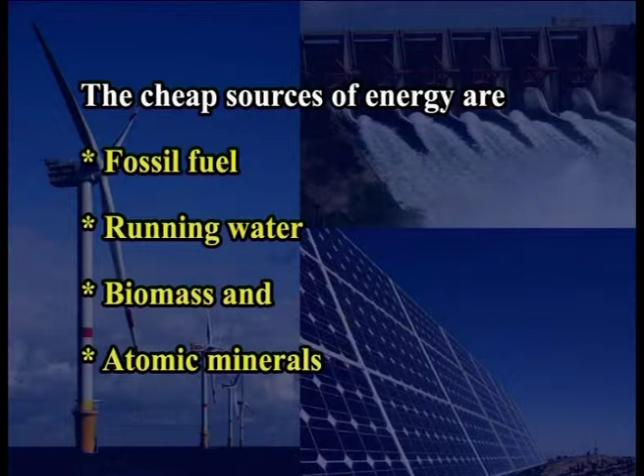Energy may be obtained directly from an energy source or it may be obtained indirectly. Energy is derived from one or more than one sources. The chief sources of energy are fossil fuels, running water, biomass and atomic minerals. In addition to these, solar radiation, wind movement, tidal oscillations, biochemical and geothermal sources also provide a good amount of energy.

The sources and use of energy by the population differ from a developed country to a developing country. It depends on the energy resources available with them. Not all continents have all the needed energy resources.

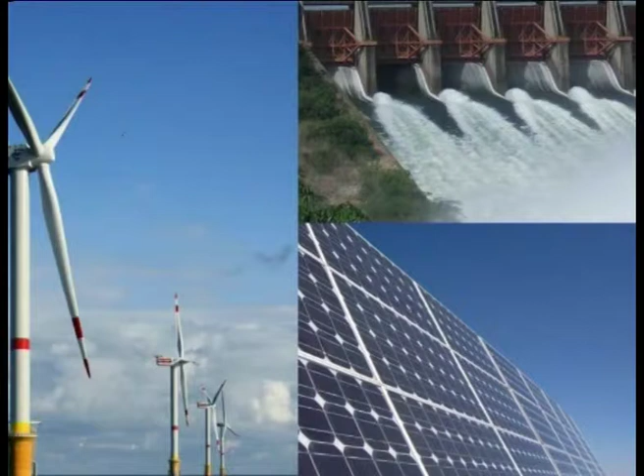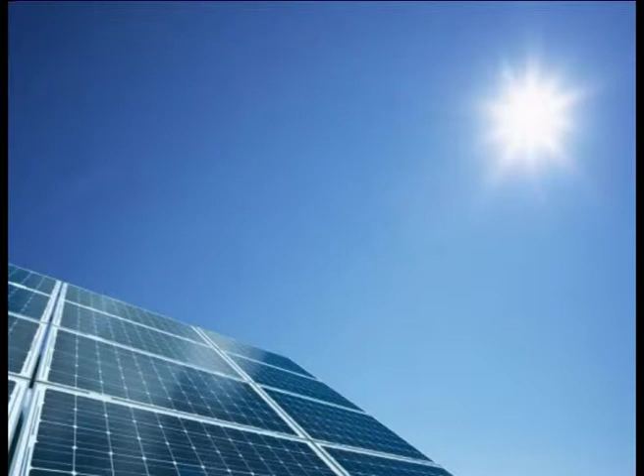Energy can be classified into several types based on the following criteria: primary and secondary energy, commercial and non-commercial energy, renewable and non-renewable energy. Renewable sources are those which will be available for our human consumption again and again. The energy derived from water as hydroelectric power, the energy derived from sun as solar energy, the energy derived from wind as wind energy and bioenergy are the renewable energy resources.

Non-renewable energy sources are those which are permanently consumed for generating the energy and need further supply. Fossil fuels like coal, oil and gas, fissionable materials for nuclear power generation and geothermal sources all come under this category. In this episode, the energy resources are discussed under the following modules: energy from fossil fuels, energy from sun and wind, energy from water, energy from biomass, energy from nuclear and other sources.

Coal is the mainstay of India's energy sector and accounts for over 50% of the primary commercial energy supply in India. Around 74% of the coal produced in India is consumed in power generation. Compared to the other sources of energy available in the country, the known coal resources are expected to last for over 70 years at the present levels of production.

About 85% of the world's commercial energy sources come from coal, oil and natural gas. These are called fossil fuels since they have been developed from the fossilized remains of prehistoric plants and animals. The use of these sources depends on their availability in a country.

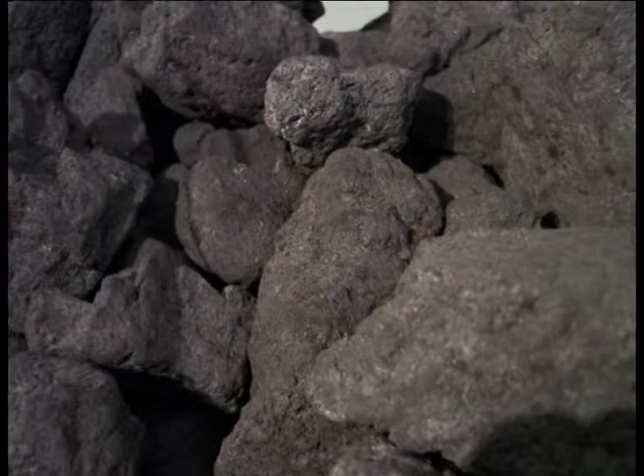While using coal, the one having low sulfur will cause less air pollution. The production of thermal power depends on the ash content of the coal used. The higher the ash content, the lower the efficiency of the boiler and furnaces in the thermal power plants.

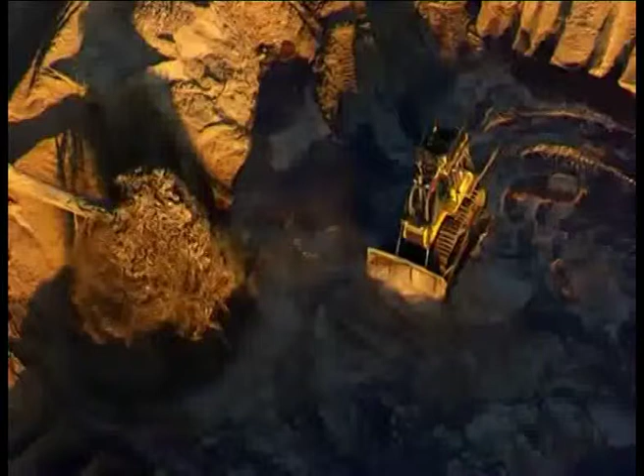The use of coal also generates much solid waste and ashes. For every megawatt of energy produced by a thermal power plant, about 1 acre of land is needed to dump the waste materials including the ash.

Coal-based thermal plants pollute the atmosphere by gaseous emissions of sulfur dioxide and nitrogen oxide, and also produce tremendous amounts of solid waste, fly ash and bottom ash. Coal mining, transport, washing, processing, shipping, combustion and final disposal of ash may lead to potentially adverse environmental effects like aesthetic degradation, noise pollution, dust pollution and the release of trace elements into water bodies, soil and air masses.

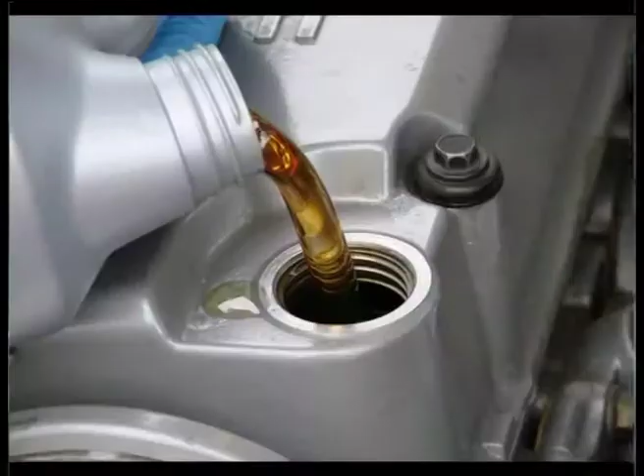Coal is a non-renewable form of energy, the use of which is to be done very economically. The next major source of energy comes from oil.

The oil that is derived from rocks is called petroleum. Petro means rock, oleum means oil. Petroleum furnishes about 40% of the commercial energy used in the world. It provides most of the energy used for transportation and other activities of the population.

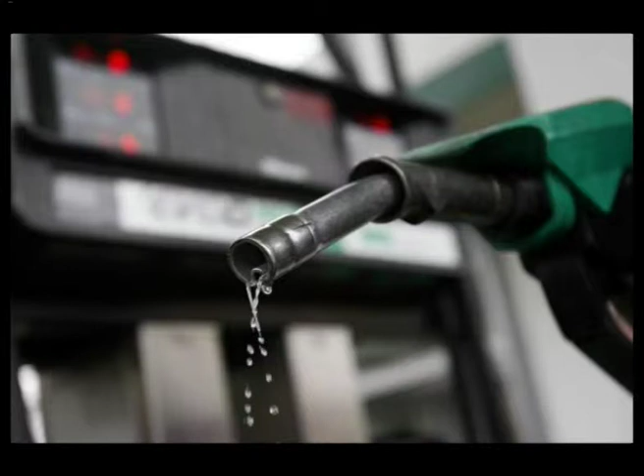In general, petroleum and natural gas are hydrocarbons. They are fossil fuels formed from organic material which escaped complete decomposition after burial in sedimentary beds. Petroleum is a complex mixture of hydrocarbons containing nitrogen, sulfur and oxygen also.

The major source for oil and gas is the fine grained organic rich sediments that are buried to a depth of 500 or more meters below the stagnant oceanic waters. These might have experienced a thrust due to an increase in pressure and heat. The water is deficient in oxygen. Various geological and biological processes have promoted the chemical transformation of these organic materials into hydrocarbons.

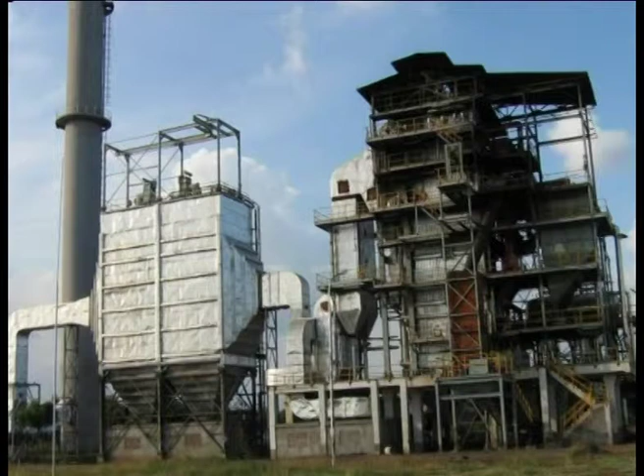They tend to migrate through the porous sediments called reservoir rocks. Like coal, oil also contains some impurities that can cause air pollution, but refineries can remove many of these pollutants when they process the petroleum.

Natural gas comprises several gases but mainly consists of methane. Natural gas which is produced in association with oil is called associated gas, whereas production from a gas reservoir not associated with oil is called non-associated gas.

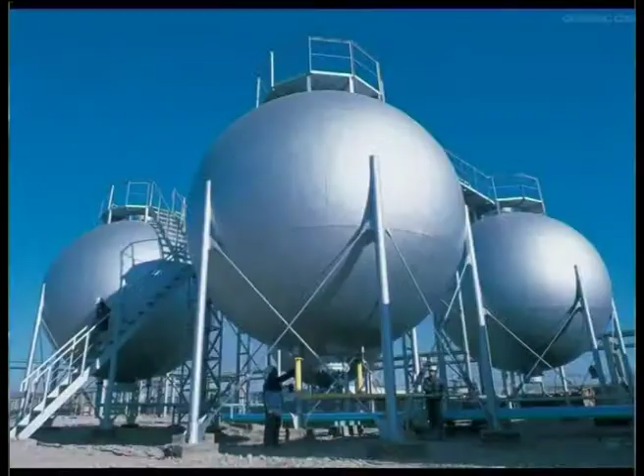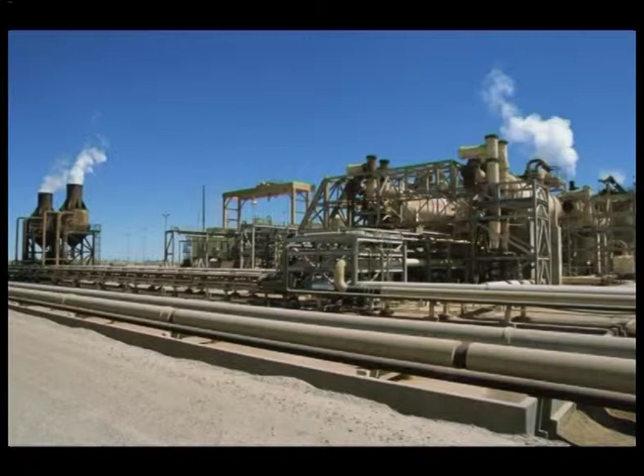Natural gas is the most conventional and convenient fossil fuel. It causes little or no air pollution. Natural gas is a clean source of energy because it is refined naturally during its formation within the earth and does not require further refining. In addition, it can be compressed into a liquid and transported long distances through pipelines.

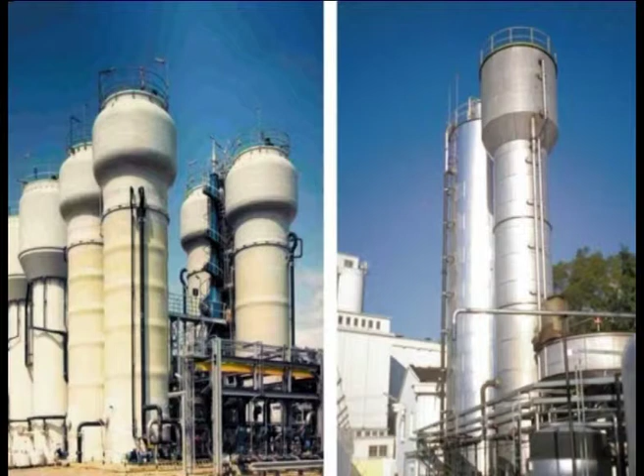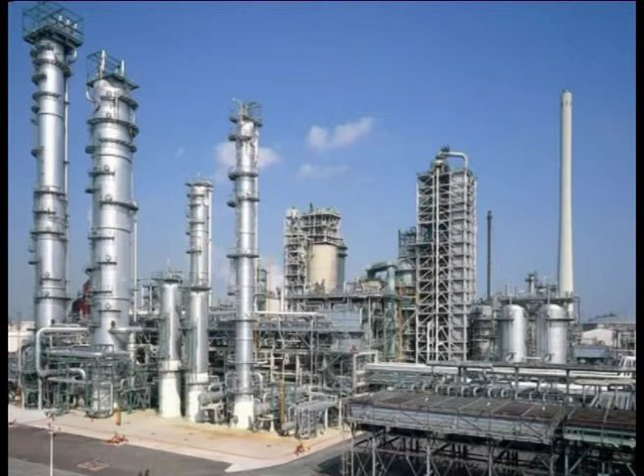Natural gas provides around 20% of the world's consumption of energy and as well as being burnt in power stations, it is used by many people to heat their homes. It is easy to transport natural gas through pipes, and gas power stations produce comparatively little pollution. Millions of people use natural gas to heat their homes, cook their meals and dry their laundries.

Typical gas consists of hydrocarbons having a very low boiling point. Methane, the first member of the paraffin series, makes up 85% of the typical natural gas composition. The following types of gas have been recognized based on their composition: dry or lean gas comprising mostly methane.

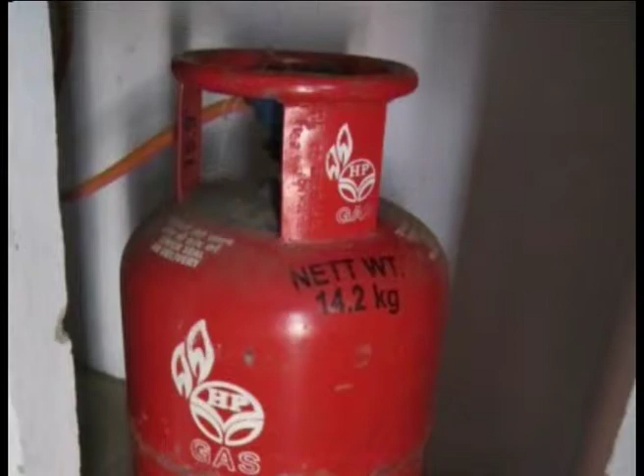Natural gas is used for domestic and industrial applications. The consumption rating for different sectors are as follows: for manufacturing fertilizers, we use about 36% of natural gas. For power generation, we use about 27%. For industrial sectors, we use about 8%, and for the extraction of liquefied petroleum gas or cooking gas, the rest is used.

The energy received from the sun's electromagnetic radiation is called solar energy. It is also used to produce electric power. It is a non-conventional and continuously renewable energy resource and source. There are two methods through which sunlight can be converted into electrical power: using the photovoltaic conversion procedures, or using the solar thermal conversion procedures.

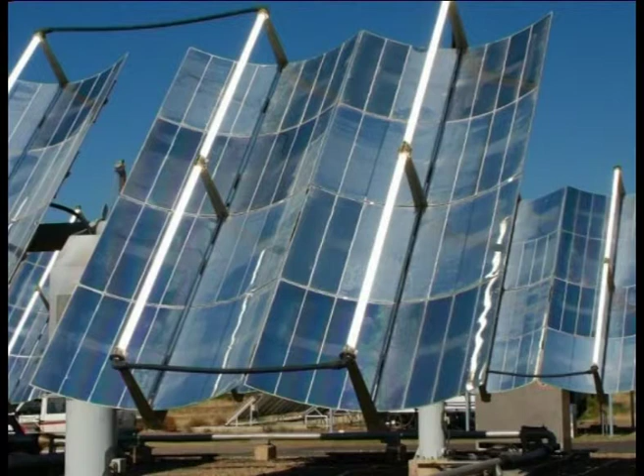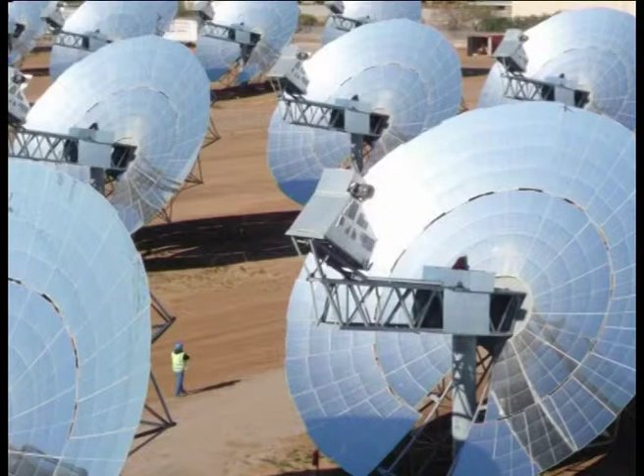It is reported that the solar energy falling on the earth every 29 seconds is equivalent to the human energy requirement for the entire day. It comes from the sun and it is plentiful, but the distribution is very sparse. It must be collected and concentrated to produce usable power, which requires some special devices. Hence, harnessing solar energy is an expensive affair.

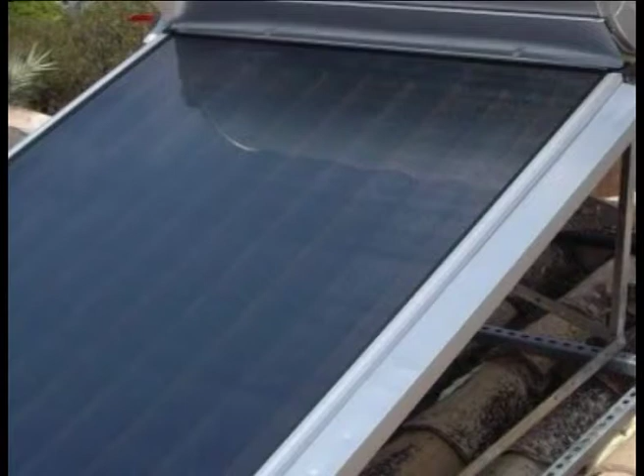A typical solar water heater consists of a coil of copper pipe brazed to a blackened metal base. This assembly is covered by a transparent glass plate or a plastic sheet. The water which is passed through the coil gets heated up by the solar radiation. A very high amount of heat is trapped in this process during summer months.

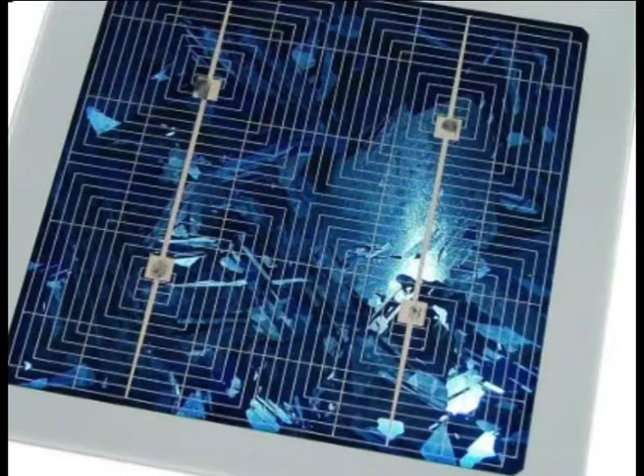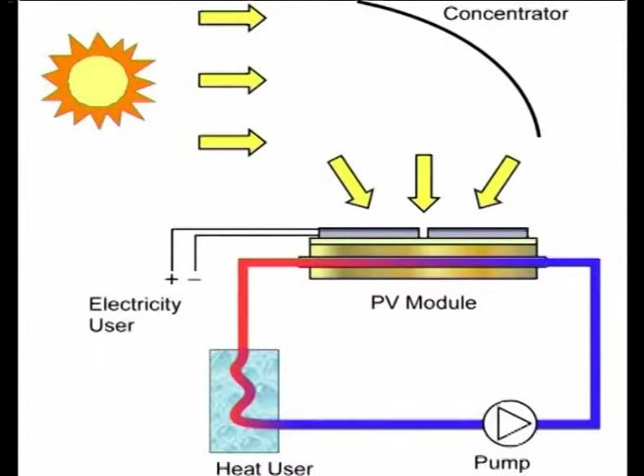Solar energy is also caught to provide power using solar cells. Solar cells are devices made from crystals of silicon to produce electricity from sunlight. They are the photovoltaic cells. Research continues on the application of solar energy for pumping up water, refrigeration, solar ponds and temperature control in buildings.

Consumption by solar energy has more advantages. Some of the advantages are: they provide unlimited power supply. There is no way of producing air pollution, water pollution, thermal pollution and noise pollution due to solar energy. There is no possibility of large scale disasters coming out of using solar energy. It conserves Earth's natural resources, and the technology is available for immediate usage.

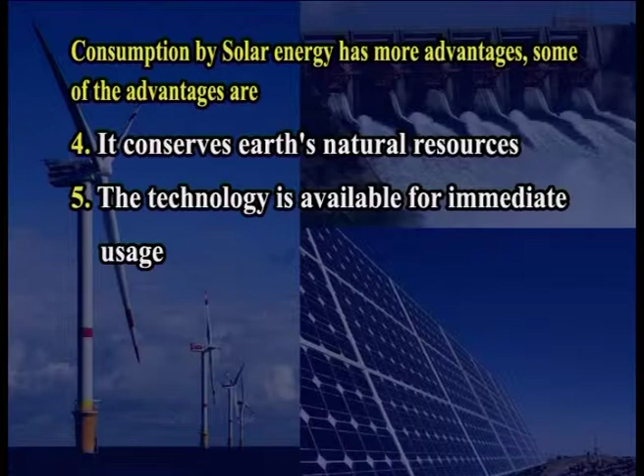The major disadvantage is the expenditure involved in establishing the solar plants. Solar cells are more expensive also. They cannot completely be able to replace the conventional fuel usage, because the society has to bear the cost of establishing the solar panels.

The next one is the wind energy. Wind is a dynamic natural force for providing power. It is the best renewable energy source available on earth. Wind energy can be harnessed very effectively. The blow of wind is allowed to rotate the blades of a windmill that is coupled to a turbine. This drives a power generator and we get electricity.

There are some merits and demerits while using wind energy. The generation period is very low, that is, on an average we may get wind energy for 5 months in a year. This is because of the seasonal availability of a reasonably useful wind.

Power generation starts immediately after commissioning the plant. Power is cost free, generation is cheaper, and the recurring cost is also very less. The installation cost of a windmill is slightly heavy, and the maintenance of machinery is also expensive. But this is a pollution free and environment friendly generation of power.

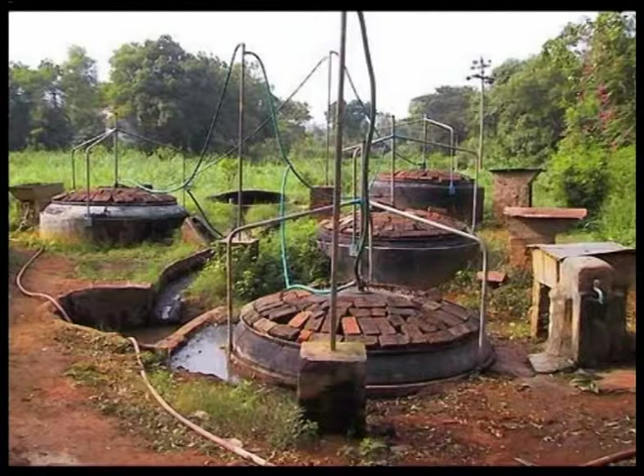Biogas is the methane gas produced or released from organic waste like sewage, garbage, manure or crop residues. These are decomposed substances in the absence of oxygen. This is similar to the natural gas in origin.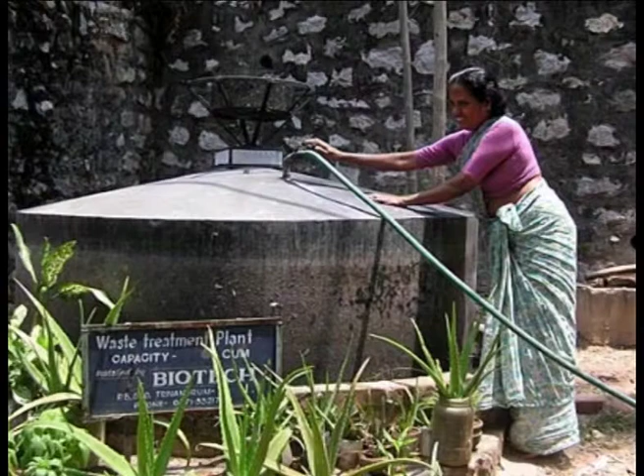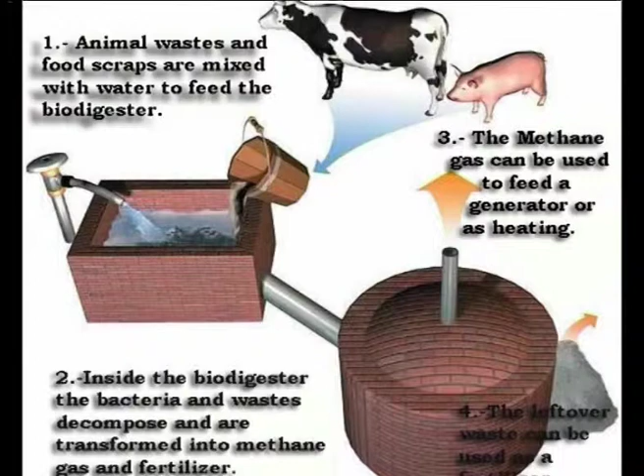Biogas can be collected using a container filled with the waste and closed at the top with a tap for trapping the gas. The wastes are mostly animal excreta or dungs which are allowed to decay and decompose naturally inside the container. After producing the gas, the used up materials can be used as a high quality organic manure in the croplands.

Community biogas plants, industrial biogas plants, night soil biogas plants, family size biogas plants and improved chullas are some of the bioenergy sources employed and are under operational conditions in several parts of the world.

Biomass fuel is the common name given to all forms of fuel generating organic remains. These organic matter can be burned directly or indirectly as a fuel. A well known popular biomass is the fuel wood.

Wood was used as a major source of energy in several parts of the world for several centuries. Firewood is the best known biomass fuel. Cow dung or cattle dung is burnt for cooking purposes in several villages. The distillation of biomass is done to produce alcohol for fuel.

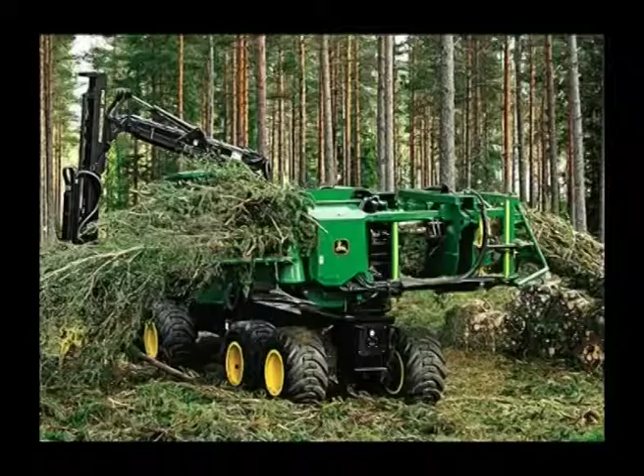There are three major sources: forest products, unused agricultural products and urban waste, which are used as biomass for producing energy. The main advantage is that the biomass under several conditions can be recycled. The main disadvantage is the requirement of energy for processing the biomass into a convenient form of energy.

Biomass energy is available locally, that is an advantage. In many places you might have seen the sugarcane farms and sugar production plants, they use the straw and dust again and again for using it as a fuel.

The main disadvantage is that the consumption of biomass fuel can produce air pollution. They also produce smokes, ashes and sometimes degrade the land areas.

The next one is energy from waste. Waste is a fuel consisting of many materials. Wastes are generated from commercial processes, industrial processes, institutional processes, hospitals and household waste. Many of them contain rubber, plastics, waste fossil oils and other similar commodities.

It is either solid or liquid in form, renewable or non-renewable in form, biodegradable or non-biodegradable in form. Solid biomass is one of the largest renewable energy sources. It represents more than 10% of the world total primary energy supply, or 3/4 of the global renewable energy supply.

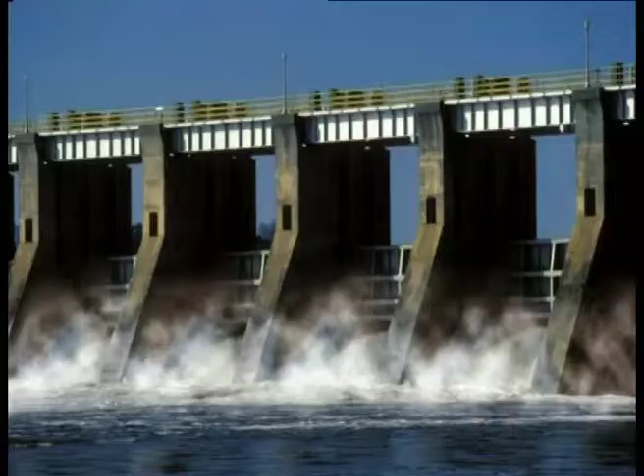Now water must be viewed as a complex vulnerability of the energy system and vice versa also. Water is needed throughout the energy sector. It is used in energy production and also conversion, as well as in other processes such as the refining of energy source products.

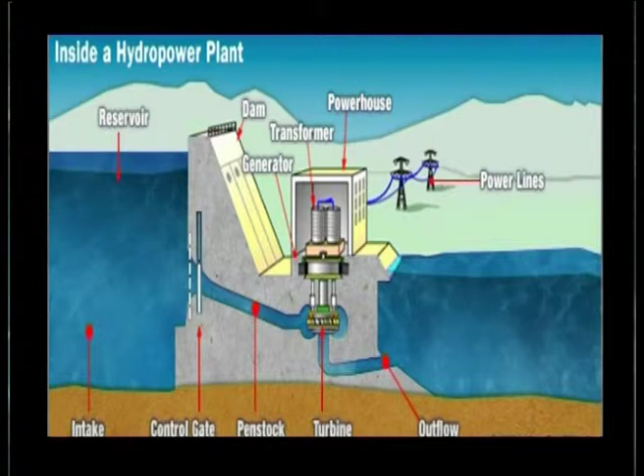Water for energy and energy for water are the two issues of concern today. Hydroelectric power generation is one of the major sources of energy over the entire globe for several decades. Hydel power furnishes about 7% of the world's commercial energy sources.

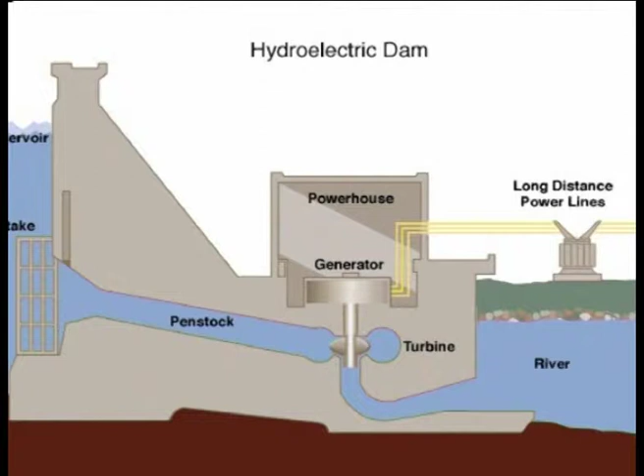Water costs nothing, and it supplies energy without pollution. However, hydroelectric power projects require at least a dam or a reservoir, which are very expensive. A hydroelectric power plant can operate only where water flows from a higher altitude to a lower altitude.

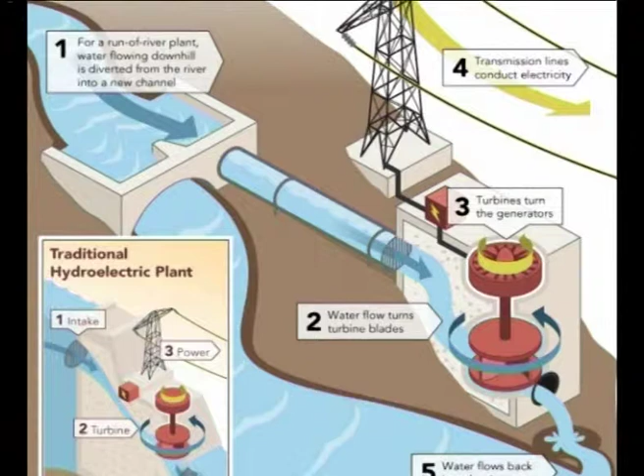In several hilly and mountainous regions, establishment of hydroelectric power plants on perennial rivers has contributed the major electricity production in many countries. Hydropower is a renewable energy source. Historically, water wheels were used to generate mechanical energy to run the mills and machineries.

Hydel power is a clean power. It requires no burning of any fuel. These power generators do not pollute the atmosphere or the hydrosphere. Hydroelectric power is also combined with thermal power plants. That is one added advantage. With this combination, the thermal power plants can supply power if the hydroelectric power plant is affected by severe drought.

The next one is the tidal power. Ocean waves are a huge and largely available energy resource all over the world. The global potential for extracting energy from oceanic waves is substantial and also considerable. Sea waves offer the highest energy density among renewable energy sources all over the world. Tides and waves can generate enormous energy for consumption.

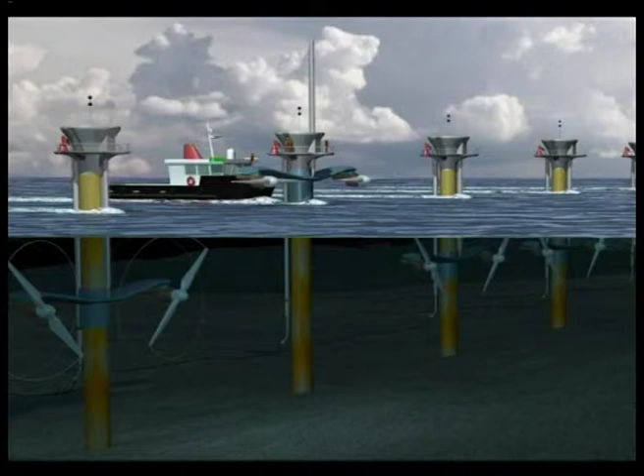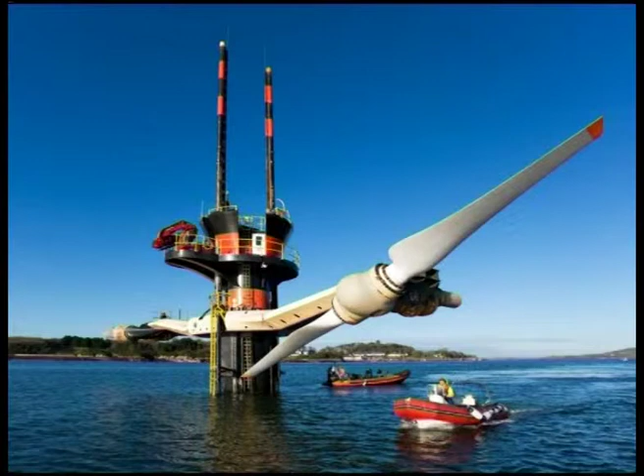The tides, which are dashing against the shores continuously, can generate the tidal power. This can be obtained by using a tidal dam built with the turbine. This is more expensive when compared to the hydroelectric power installations, but in high tide zones such provisions help in harnessing this power. There is also a limitation that it can produce electricity only at certain times of a day.

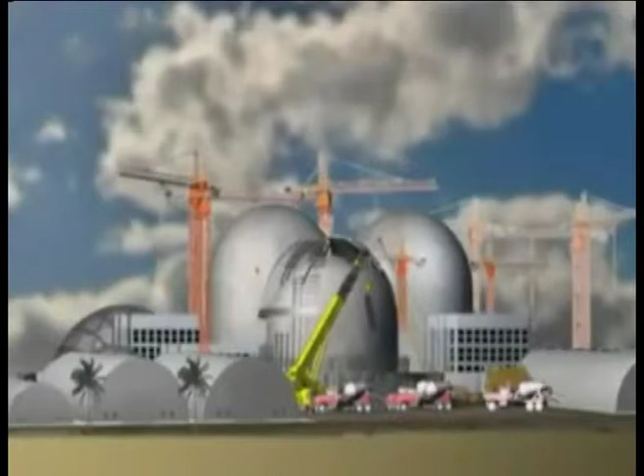Commercial production of nuclear energy maintains a controlled chain reaction within the reactor of a power plant, and it converts the heat released by the atoms to steam engines and uses the steam to generate electricity through dynamos or turbines.

The energy produced from splitting atoms is far greater than the energy produced from combustion of the same amount of matter. So, the production of nuclear energy requires less land and fewer materials. It generates less waste than production of energy from the burning of fossil fuels.

Many of the environmentally conscious countries in the world depend on nuclear power for their electricity generation. At present, about 17% of the world's electricity is generated through nuclear sources. Nuclear source is very clean, and it is compact and concentrated.

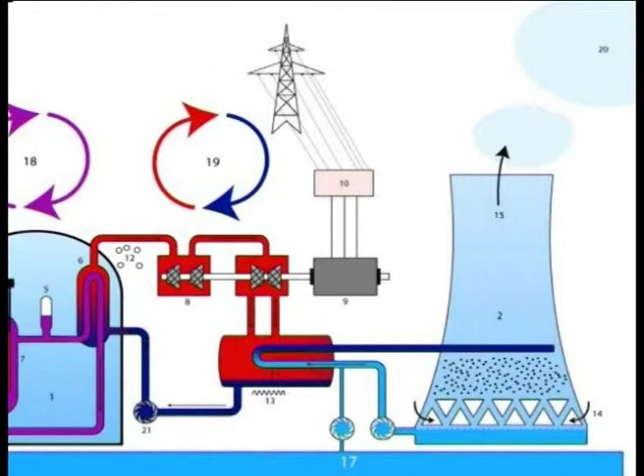A nuclear reactor requires a fuel substance whose nuclei can undergo fission. Such substances are called fissionable substances. Uranium 235 and plutonium 239 are the widely used nuclear fuels.

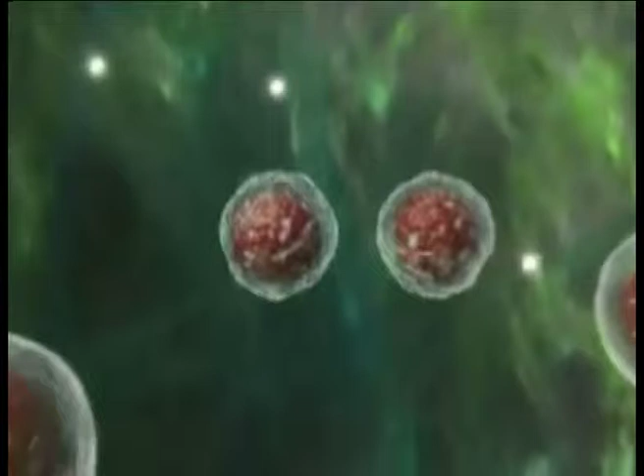In addition to the fuel, reactors also require neutrons. These are the stimulators for chain reactions. Safety, design and operation of reactors depend on the way by which these neutrons are managed inside the reactors.

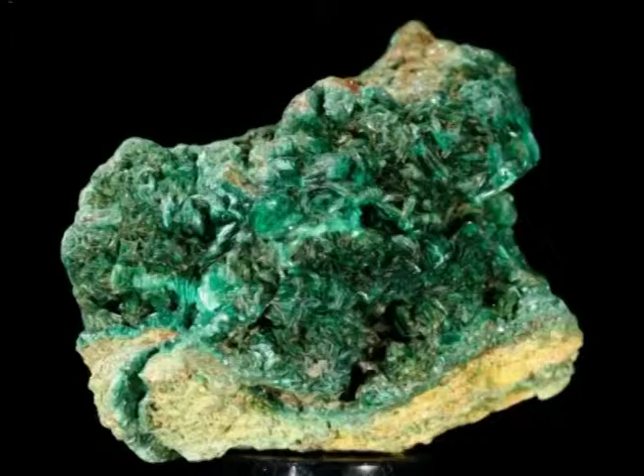Nuclear reactors are classified based on the fuel, based on the coolant, and the moderator used to support the nuclear chain reaction. The natural concentration of uranium in the Earth's crust is about 2 ppm.

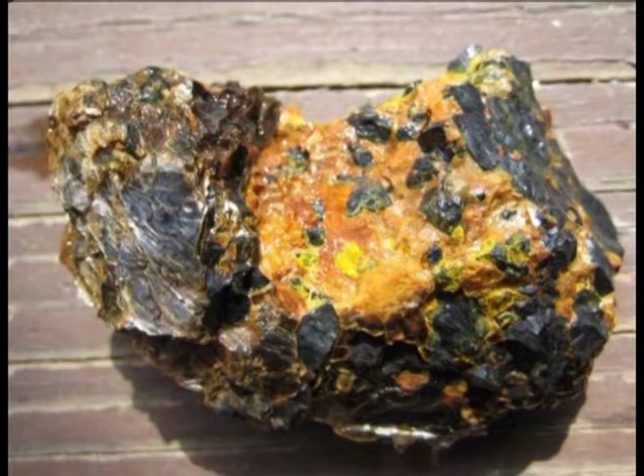Uranium originates in magma. It is concentrated to about 4 ppm in granitic rocks, pegmatites and other rocks. They occur in a large number of minerals, called as rare earth minerals or radioactive minerals or atomic minerals.

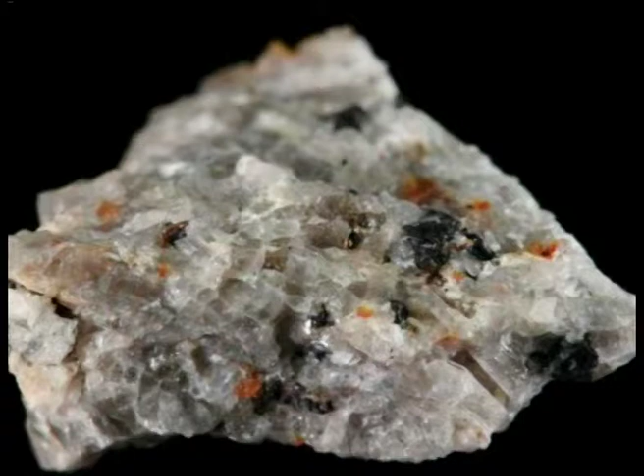They contain uranium or thorium as an essential part of their chemical composition. Some of them are oxides and some of them are complex oxides. The disposal of nuclear waste, some radioactive liquids and gases, will affect the environment very severely.

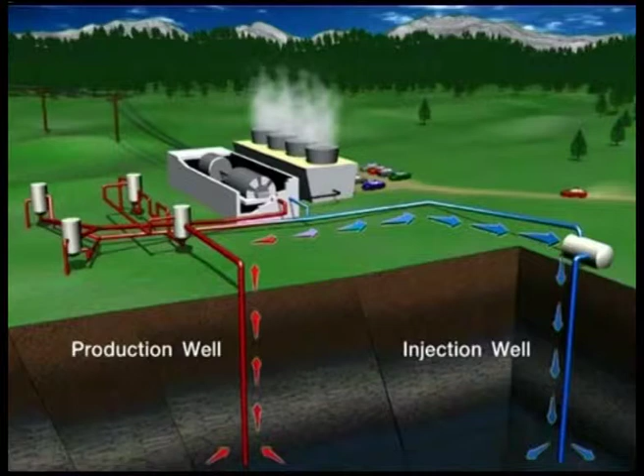The next important energy source is the geothermal energy. This refers to the heat energy emanating from the Earth's interior, which could be used for heating or for generating electricity. The production of geothermal energy can occur only in areas where hot rocks lie below the Earth's surface.

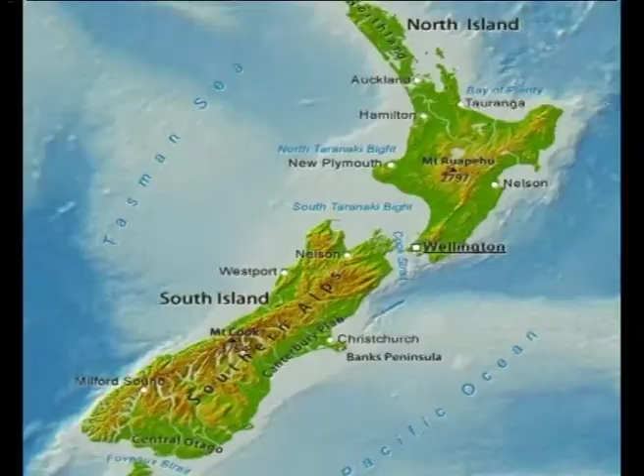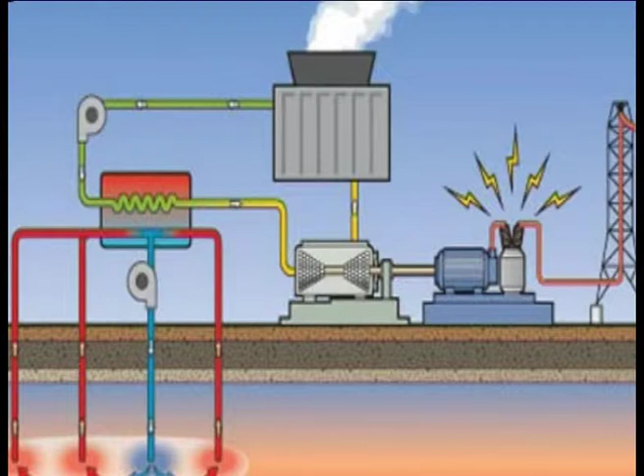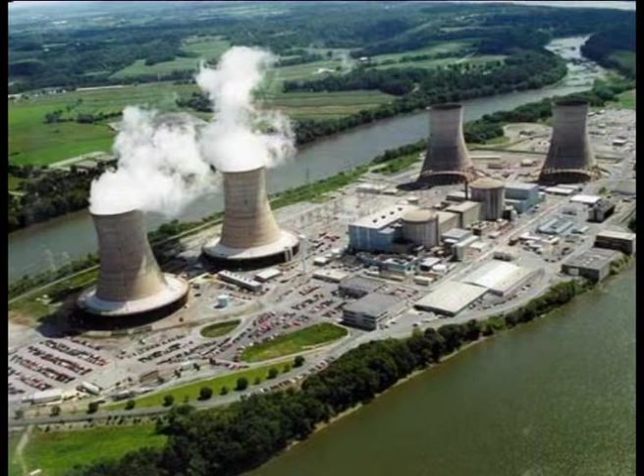Energy is needed for the present and future generations. Earth has various sources of energy. The non-renewable energy depletes very quickly due to the pressure of population. Harnessing the renewable energy is the prerequisite for our future survival. Energy saved is energy produced is a common slogan of the modern society. Let us save the energy and use it appropriately.